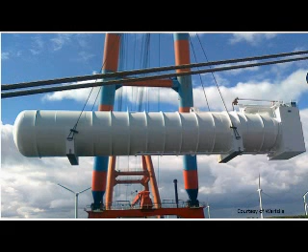The first slide of the presentation depicts a Type C gas storage tank, which is considered to be the most critical aspect of the fuel system in an LNG fueled vessel. So a large part of our presentation will be devoted to such type of storage tanks.

The general knowledge areas that you need to deal with are described herewith. First of all, in the design, we need to determine the functional requirements. We need to ensure that the safety of the system is at least equivalent to heavy fuel oil-fueled ships.

A necessary ingredient of the study is a risk assessment. By risk assessment, we mean the identification of hazards associated with the installation, and possibly the mitigation measures that we need to take to address this type of hazard.

It's a necessary ingredient. For example, the fuel storage tank, where we store the LNG in liquid form—actually in a saturated form because there is a combination of vapors and liquid phase—has to be sufficiently protected against damage, mechanical or otherwise, from adjacent fire, or from collision, grounding, so it needs to be protected. A scenario has to be devised that will tell us what will happen in such an eventuality.

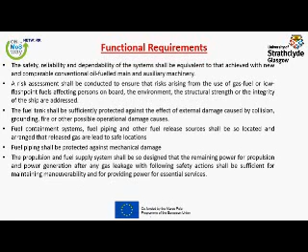The fuel containment systems and the piping must be so arranged that the potential release of gas will not cause problems, and the release of gas will be in safe locations. Also, what remains after an accident from the propulsion standpoint has to be enough to provide capability for maneuvering and powering.

So the tank design process, which is the most critical aspect of the system, is governed by what we call the 4 Ds. First, define the operation requirements and possible restrictions. Second, determination of the design loads. Third, determination of what rules and standards are applicable. And last but not least, the design of the tank structure and its supporting arrangement.

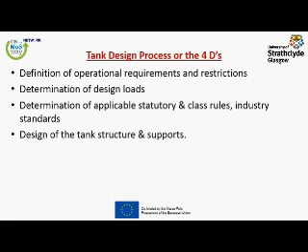Operation requirements and restrictions have to do with the definition of maximum and minimum pressure and temperature ranges, and determination of the storage volume. How do we determine that? If we know the range of action for the ship and the fuel consumption in the engines, we can determine the necessary quantity of gas. Knowing the density at that pressure and temperature, we can compute the necessary volume.

We need to determine the LNG consumption rate and the worst possible environmental loads for the design. The LNG has to be safely stored and has to have high reliability and a specified fatigue life. The fatigue life, as you realize, for such an expensive piece of equipment, has to be more than the design life of the vessel. So assuming we are dealing with a 25-year design life, it has to be at least more than 25 years.

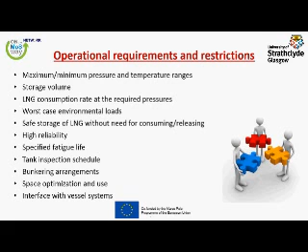We need to determine the inspection schedule for the tank, at least for the parts of it that can be inspected, because some parts, as we're going to see, are not possible to be inspected. We need to determine the bunkering requirements, which are very important, optimize the space that the tank will occupy, and determine the interface with the rest of the systems aboard the vessel.

Design loads. I will go quickly through the design loads definition. Besides the weight of the fuel in the tank, we need to consider the inertial loads—the mass of the fuel times the acceleration. We have three components of acceleration: longitudinal, transverse, and vertical direction. This can be determined either by semi-empirical formulas or by sea-keeping computation.

If we utilize the wave spectra, these are the 10 to the minus 8 probability accelerations. So the objective is to determine the triaxial acceleration at the center of gravity of the tank, which will act along with the vector g, which refers to the static value.

Another important quantity is the sloshing. The sloshing loads depend on the geometry of the tank, on the filling level, and the fluid density, as all the pressures depend, and also on the orientation of the tank. The tank can be horizontal or even vertical, under certain limitations.

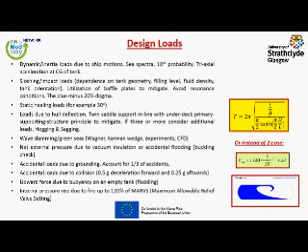In general, we try to separate hazardous areas from non-hazardous ones. One way of separation, of course, is fire insulation. We use A60, A0. By A60, A0, we mean special classes of insulation. A60 can withstand fire for 60 minutes.

In addition to that, bulkheads surrounding the hazardous area can have cofferdams, empty space which has air insulation. The bilge systems from dangerous areas, from hazardous areas, should be separate from those of gas-safe areas. And we'll see how we classify the hazardous, various degrees of safety risks around the vessel.

The ducting also that is used for ventilation of hazardous areas should be separate from the ducting for gas-safe spaces.

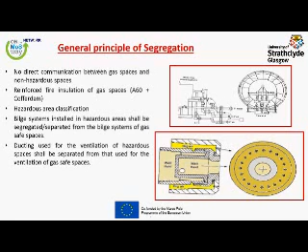The location of the tank is going to be established by the International Gas as Fuel and other low flash point fuels, IGF code, which will hopefully come into force in the first half of 2017.

In the code, the most critical aspect is still where to put the gas storage tank. There is what we call the deterministic idea, where we put it for cargo vessels at a distance of B/5, 1/5 of the breadth, or 11.5 meters, whichever is less. And

then for passenger vessels, this goes up to, goes below, is more strict, to B/10. For the tanks that are close to the bottom, the distance is B/15 or 2 meters, whichever is less.

For tanks in the bottom, yes? Sure. Excuse me, can I see the previous?

As far as I know, the idea of this regulation is still under discussion. Is it confirmed? No, it has been finalized. Finalized, yes, last year it was finalized. But this issue is still under discussion because, as I will show you, there is also another idea that came from Norway. Yes, but still under discussion. I would say what it looks like is that both schools of thought will be applied.

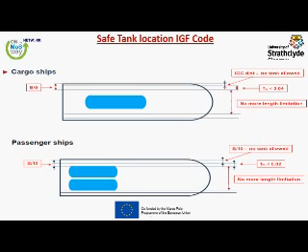So the other school of thought, to reply to your colleague, is the so-called probabilistic approach initiated by France and Norway, where we try to achieve a certain value for an index, the FCN index, which is based on the location of the tank, checking in the transverse, vertical and longitudinal direction.

What do we mean by that? In the longitudinal direction, if you are forward, you are in trouble. In the transverse direction, if you are close to the side shell, you are in trouble. In the vertical direction, if you are close to the bottom, same. So depending on where the tank boundaries are, we have certain values associated with that index.

These values can be found in the probabilistic stability calculations. So those of you that deal with this can find these values through probabilistic stability ideas. The value has to be 0.02 for passenger vessels, which is stricter, and for cargo vessels, 0.04.

To reply to the question, it appears at this point that both are acceptable. We will know better when the code comes into force, most likely July 2017, by IMO.

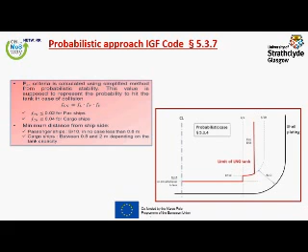So discussing a tank below deck, below accommodation, usually people don't like to put pressurized containers there because of the amount of energy below accommodation. So there is a limitation.

The pressure in the tank has to be less than 10 bar. 1 atmospheric pressure is 1 bar, so we don't want to have more than 10 bar gauge in the tank. The tank has to be ventilated, with ample ventilation in the space, usually a minimum of 30 air changes per hour, and it has to be isolated from the adjacent space.

Like you see, the storage tank goes to feed the gas engine with piping which has double wall piping. At the same time, there is A60 class fire insulation and the cofferdam. Usually both of these measures are necessary, but we can get away without the cofferdam in case of Type C tanks. Type C tanks are considered to be, as I will show you, a little bit safer than the others, more difficult to leak or have problems.

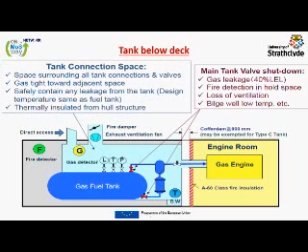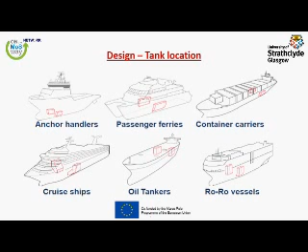For example, you see some arrangements where the storage tank is below deck. This is acceptable. As we realize, space is a premium in the vessel.

The safety analysis that we do aims to reduce the probability of leakage. In case of leakage, we try to reduce the probability of ignition by removing potential sources of ignition, like sparks, for example. We need sparkless fans, and also to reduce the consequences of possible release and explosion.

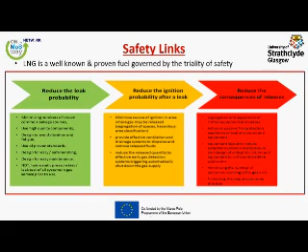Now, the types of tanks. Yesterday you discussed the membrane type of tanks promulgated by the French company GTT, and you discussed the advantages and disadvantages of this tank.

Today we'll discuss the remaining types, type A, which are not participating. I'll show you pictures. They do not participate in the global strength, the hull girder strength of the vessel. They are part of the ship, but you don't consider these tanks to be part of the longitudinal strength of the vessel. And they are not essential. Suppose we lose that tank - they are not essential to maintain strength and integrity.

Type B are designed with advanced analytical tools and methods, and we compute the stresses, the fatigue life - we'll discuss a little bit about it - and possible crack propagation. Crack propagation ideas are applied in the design of type B tanks.

Then the cylindrical tanks I showed before are the type C, or I will call them cryogenic, from the Greek word cryo, meaning cold - cryogenic pressure vessels. They are designed on the basis of recognized codes, and they are supplemented by IMO, IGC, and IGF codes.

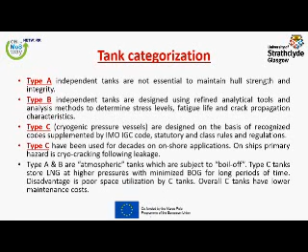But what is the disadvantage? I will agree with yesterday's speaker that the space utilization of Type C tanks is poorer.

So if in the tanks we have some failure that cannot be detected, that we will not be able to detect in future inspections, we need to ensure that this critical state will not degrade to failure for the lifetime of the tank. So if we have a crack, we assume the weld will have an initial defect, and this defect will not propagate to a critical size.

What do I mean by critical size in a crack? After a crack grows, it reaches a certain point where it propagates at the speed of sound in steel. This is the critical condition, uncontrolled brittle fracture. So we need to ensure that for the lifetime of the tank, areas that cannot be inspected will have no propagation to critical size.

For Type C tanks, because the probability of structural failure and leakage is lower, we do not require a redundant barrier, what we call a secondary barrier. For others, besides the first barrier to LNG, we also have a secondary barrier. For Type A tanks, for example, we have the hull itself playing the role of secondary barrier. For Type B tanks, we have a partial secondary barrier—all we need is to collect the leaked gas. For Type C, there is no need for a secondary barrier.

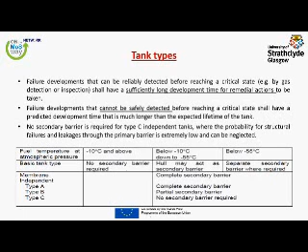So the four types of LNG tanks are shown here. This is a spherical Type B tank. This is a Type A tank, and this is a Type C tank. This is the membrane tank that you saw yesterday, which we find in LNG carriers.

But it can be utilized as a fuel tank in LNG-fueled vessels. GTT had the idea of retrofitting ships by jumbo-sizing, increasing the length by adding a section and converting it to a membrane tank, of course with appropriate cofferdams forward and aft of the tank. So the membrane tank is an idea of GTT and can be utilized to save space.

Imagine, for a tanker it's not difficult to add a Type C tank. But what is going to happen in a bulk carrier? In a bulk carrier you have the cranes, you have the hatch covers—where are you going to put it? Well, here is the answer: if you want to use LNG as fuel, you can add a section and use a membrane tank.

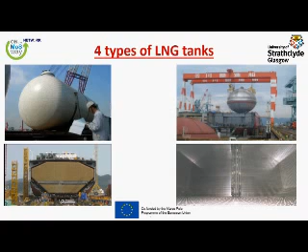Further to that, suppose you have a container ship—you can have a container-contained tank. You have, say, a 40-feet container, and inside the standard FEU, 40-foot equivalent unit, you can have a fuel tank, and you can have a few of these contributing and going to the engine. So that's another possibility.

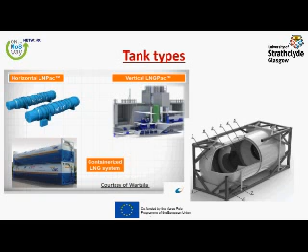Looking at Type A tanks, we have water ballast tanks and the secondary barrier, which is the surrounding hull. This is the secondary barrier, and of course the primary barrier. Between the secondary barrier and the primary barrier there is insulation, which we need to keep the temperature at minus 163 degrees.

Here's a picture. Anybody know what is this brown color?

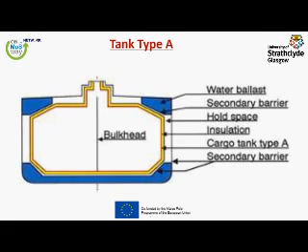This is insulation, not steel. We put insulation around - from this picture, it must be foam insulation. Foam can be applied very fast, not as effective as other types of insulation, but this appears to be foam insulation. This is a part which is waiting to be insulated, so we can use perlite or foam.

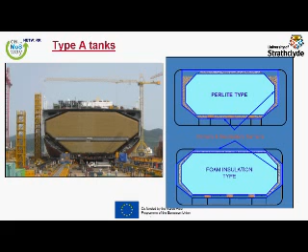Type B tanks are also known as Kvaerner Moss tanks, and they are spherical. They require a lot of space, as you can realize, but the first of this type of vessels as carriers have been utilized, have been built in Japan. We might see spherical tanks as well, which can be also prismatic.

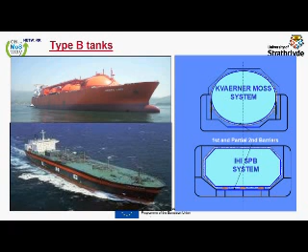Let's look at this leak before break philosophy. When we have a crack in a vessel, this crack will propagate - let's assume this is a circumferential crack, which is subject to longitudinal stress. Always the crack propagates perpendicular to the principal stress, although in a cylindrical vessel the maximum stress usually is in the tangential direction, called the hoop stress.

But in the longitudinal direction, you might have a combination of the longitudinal stress from pressure and bending stress. We also have bending, so let's assume for this discussion that we have a longitudinal stress driving the crack. The crack is propagating circumferentially, but at the same time it is propagating through the thickness. So we have 3 degrees of freedom: clockwise, counterclockwise, and through the thickness.

We want the crack to become critical only through the thickness. We don't want the crack to become critical in the circumferential direction, because if that happens, we have a problem of shattering the tank within fractions of a second. Speed of sound in steel is 4,000 meters per second.

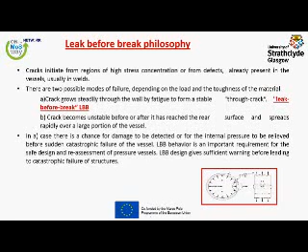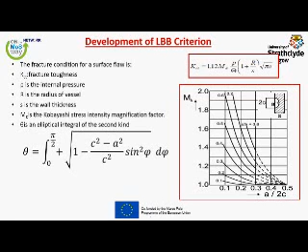Going back to fracture mechanics - you don't need to know fracture mechanics to apply this idea though. The crack will become critical when the stress intensity factor of this crack becomes equal to the fracture toughness of the material in the circumferential direction. So we have this scary looking formula, but no need to worry about it. MK is the Kobayashi magnification factor, taken from this graph on the basis of the aspect ratio of the crack, and then you can compute the pressure which will make that crack run critical.

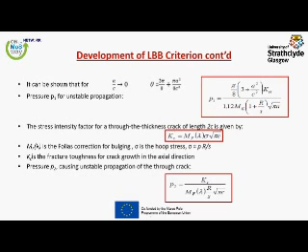At the same time, we apply the same idea to find when the through-thickness propagation will become critical. We get critical pressure for the circumferential direction and critical pressure for the through-thickness. For this to occur first, this pressure has to be larger than that one. So eventually we end up with this formula, which gives us a condition that, if satisfied, means we won't have critical crack propagation - instead, the crack will go through the thickness and we will see a leak.

We know when we have a leak. How do we know? Because we have gas detectors in the interbarrier space - the space between primary and secondary barriers. So the detectors will go off and we know something is going on. The leakage, which has to be contained for 15 days, will be known, so we can take care of it. The problem that we know is easier to tackle than the problem we don't know.

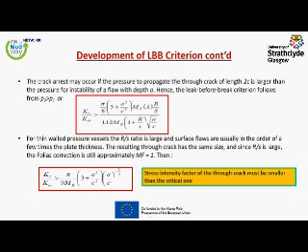So this condition will tell us if an initial defect, an initial crack, will become critical. The thickness is implicitly contained in the Folias factor. The leak before break - you can learn more about it - is a basic design criterion in the design of pressure vessels.

Type A tank, which does not have leak before break in its design, has relatively low pressure, as we said, and it is what we call an independent tank. In the membrane tanks you saw yesterday, there is insulation around the tank. Here we have supports, but it is what we call an independent tank - it is not integrated with the hull. So to be independent, it has to be supported.

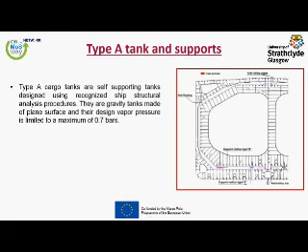The support system includes supports to prevent rolling, supports to support the weight of the tank (vertical support), supports to prevent pitching (longitudinal motion), and supports to prevent lifting of the tank. I believe this is also applied in type B tanks - this type of support we also have in type B. Somebody might decide they prefer type A or type B tank, not type C or membrane - this is also an option which must be put into the table.

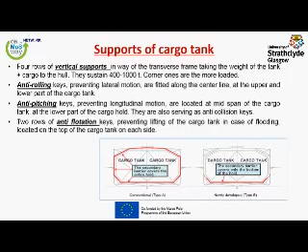Here you see a picture of independent tank A and a series of anti-floating devices. In case of flooding with an empty tank, buoyancy might push it up. We don't want that to happen, so these supports keep the tank from lifting up. But these supports create problems—they need to be checked for cracking, and their design needs to be evaluated.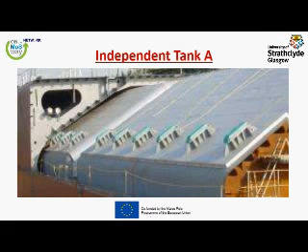In type C tanks, which are mostly double walls and vacuum insulated, we have two tanks, one inside the other: the inner tank and the outer tank. The space between the two is filled with insulation material and kept under vacuum.

In addition to that, we have reflection shields for radiation. If you go back to your heat transfer courses, take two plates and put one plate in between which acts as a shield—you will notice a reduction of the heat transferred from one plate to another. We try to avoid heat transfer from the outer level to the inner level, so we use radiation shields, not one, not two, maybe three or four, to reduce this heat transfer.

This tank has to have a high holding time. Holding time is how long the tank can withstand and keep the liquid inside. Usually type C tanks have very high holding time and excellent insulation properties, but they are expensive—not as expensive though as the membrane tanks.

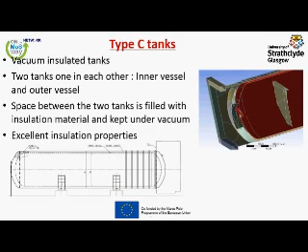Membrane tanks you discussed yesterday. I'm not going to spend time on that.

Do you know which type of tank containment system we have here? I can tell you it's corrugated—Mark III, yes, we have a Mark III system. The trick is Mark corrugated, the two R's. Corrugated Mark, it's not easy to remember. The other is NO96, and now there's Mark V, and so on.

They increase the thickness of the insulation, trying to get lower boil-off rates, because boil-off is not good. Why is it not good? We lose fuel, number one. Number two, methane cannot go—if it's not burnt in the engine or somewhere else, or reliquefied, it's not a good idea to have methane in the atmosphere. It is 20-25 times more damaging to the environment than CO2. We don't want methane emitted freely in the atmosphere.

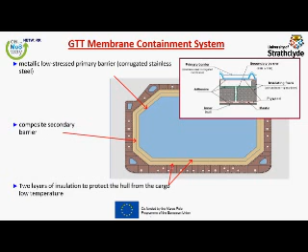So overall, the fuel system—we'll discuss it a little bit. We have the bunkering facility going to the fuel storage, fuel containment tank. Then we have some treatment, meaning we vaporize it using heat exchangers. And to send the gas to the engine, we need to compress it—so we have vaporization and compression.

Then we have a central master valve, as we call it, which in case of leakage we close to isolate the source fuel from the tank. Then we have what we call a gas valve unit, which among other things has a redundant isolating valve—I will show you later—a block and bleed valve arrangement that also isolates.

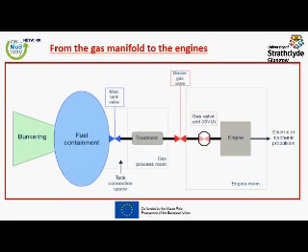Then we have the engine, dual fuel, and then we go to the propeller for propulsion. So this is a schematic view of the fuel system, but in reality it is maybe 100 meters of drawings.

Associated with the LNG fuel vessels are two different philosophies of engine rooms. We have what we call the gas-safe engine room—as the name implies, there can be no release of LNG in that room. We design it in such a way that LNG cannot leak. How? I will show you.

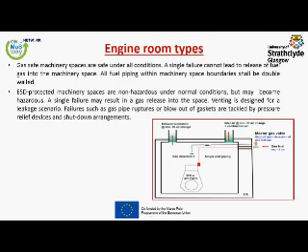And then there is the emergency shutdown philosophy, where we can have release of LNG. We don't like it, we try to avoid it, but we might have release of LNG. To take care of that, because we cannot lose power, we need a redundant means of propulsion—not only one engine but two. We lose one engine, we utilize the other, so we can go to our origin, to our place of destination.

So the gas safe arrangement—notice that after the gas valve unit, or actually after the master valve, we have a double pipe. I will show you the double pipe: there is inner and outer. Very expensive, this is a very expensive pipe. And then it goes to the engine. Because of this double pipe arrangement, and because of the ventilation, we believe that this is a gas-safe space—no gas there.

What does it mean for you, the designer? It means that you can utilize electrical equipment that is not explosion-proof according to IEC, International Electrotechnical Commission. If you are in a gas hazardous area, there are special regulations required for equipment like pumps and fans—they need to be specially designed, and that means they're expensive. So in the gas-safe engine room, this is not required because we believe we've done our job properly and there's no way this gas will be released.

You will see though that the double piping is very complicated. I will show you some pictures from MAN—it is not easy to make. So this is one way.

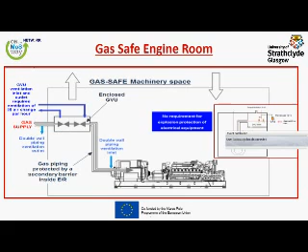The emergency shutdown engine room—here we don't have the expensive double pipe. We have gas detectors which look like this. And in this case, because there is a likelihood of gas release, all the equipment must be safety critical equipment, like fire and gas detectors, fire and gas alarms, lighting, ventilation fans. They have to be explosion proof, which is expensive. Also the ventilation must be 30 air changes per hour—this is a universal value, appears to be the norm for ventilation.

And what you see in this picture will be reproduced adjacent to it because of the need for redundancy. Please keep in mind that this engine room, because it's gas hazardous, has to have A60 insulation, class A60. I'll show you how it looks, this A60 class, and the possibility of cofferdams.

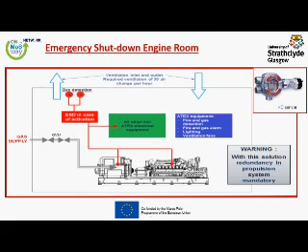You are just discussing the manufacturer. It covers, and it is part of this presentation, the connection of the double pipe and the valving and the injection area. There is a special valve in the engine that regulates the mixing, as Professor Theotokatos described. It regulates how this is mixed and how it is to be isolated. This is the only part we cover. The rest of it is—

Have you had gas leakage? There is no, so far there are no incidents of problems.

Of course, as you probably know, there are fewer than 100 ships that are LNG fueled. So the makers so far are doing studies to improve the safety of their engines by utilizing proper designs. I refer you to the Wärtsilä and MAN literature, where it says how to avoid communication between, say, lube oil and gas, and what we discussed before—the lack of segregation between hazardous and non-hazardous spaces in the engine. But we are concerned only up until the valving, where the mixing takes place.

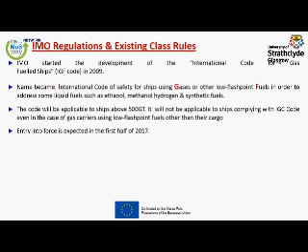The rules related to the use of methanol are going to be contained in the IGF code. It is not applicable—the IGF code refers strictly to ships that use LNG as fuel. The ships that carry LNG as cargo, LNG carriers, LPG carriers, are governed by the IGC code, as you probably already heard in this series of lectures.

So I would like to show you some ideas for the tank. We have the main tank, double wall tank as it looks like, and the space in front of the tank is called the tank containment or tank connection space. This space is very important—it's also called the cold box.

In this space we have a series of equipment like heat exchangers and pumps that take the liquid LNG and send it to the processing unit where it vaporizes and is compressed to go to the engine. Because we might see leakage in that space, and the rest of the space here might be contaminated by gas, this space communicates with the outside through what we call an airlock. An airlock is a room which is air pressurized above the surrounding space, over-pressurized, and presumably free of gas.

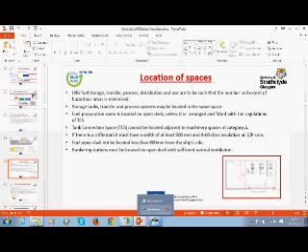So, questions from the audience. We had some questions during the discussions, but overall, what is your feeling?

You realize LNG is an explosive gas. If we have between 5 and 15% concentration of LNG, we have explosion. So we need to regulate. But I would like to tell you that the safety record of LNG is actually fantastic. We have very, very few accidents. We have many more oil tanker and chemical tanker casualties than LNG carriers. LNG carriers are very, very safe, and we believe the same safety record can be achieved in LNG ships.

In your opinion, what is more dangerous, LNG or LPG? I think that LPG is more dangerous. As far as I've read, LPG has further problems than LNG. For example, it's prone to boil if it's heated from underneath, causing an explosion and penetrating through the tank, and so on. And the most critical one is that LPG is heavier than air. LNG is lighter than air.